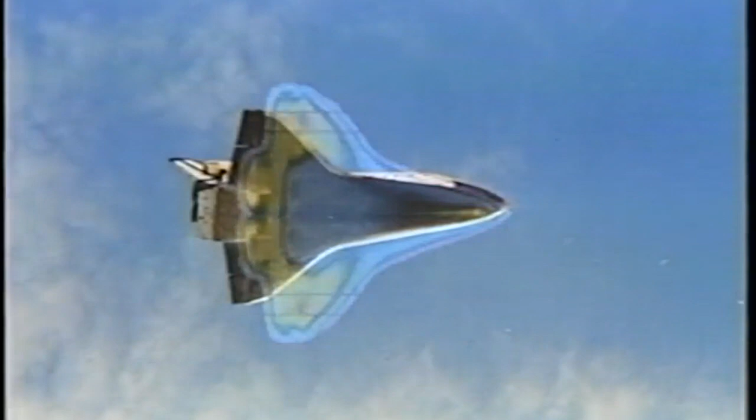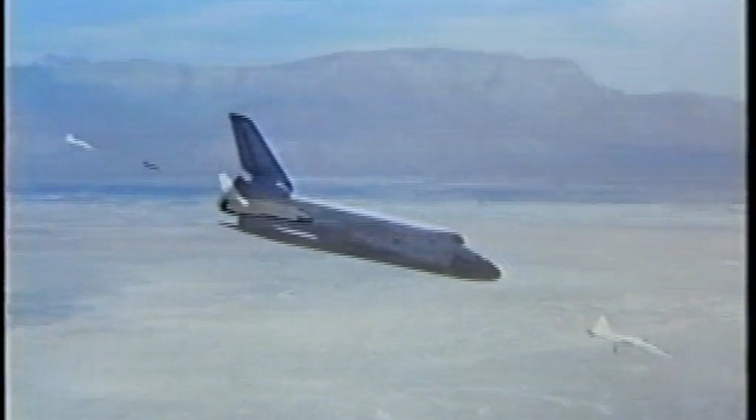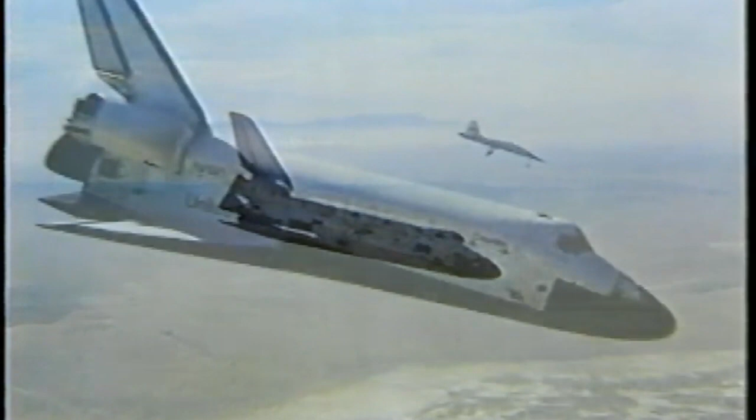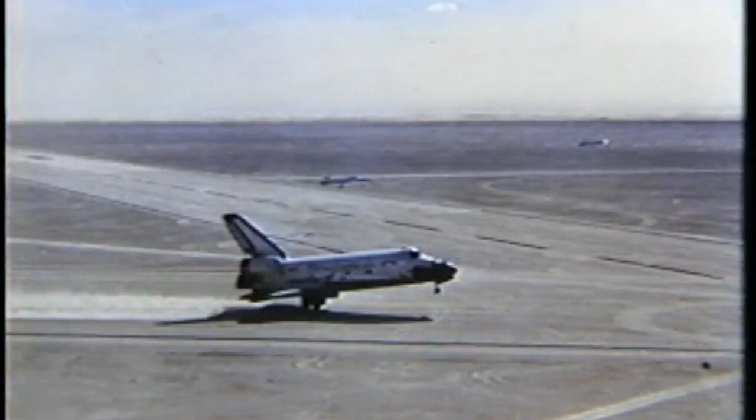A pilot's ultimate challenge. Landing a 100-ton shuttle following a week in space. 5, 4, 3, 2, 1, down. Landing on the numbers. Landing with no go-around. Beautiful, beautiful. Take it up to higher. Gonna dust it off first.

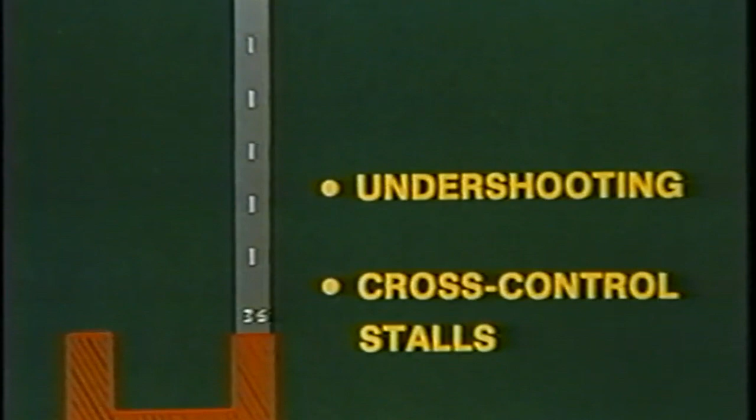In Part 1, we'll deal with undershooting and cross-control stalls, the kinds of accidents that can happen before you reach the runway. We'll also talk about hard landings, porpoising or pilot-induced oscillation, and loss of directional control, problems you encounter after reaching the runway. Part 2 explores problems stemming from improper braking, landing long, and poorly executed go-arounds. Part 3 addresses gear-up landings, landing gear emergencies, landings in inclement weather, landing at night, and human factors. We believe On Landings to be the most comprehensive educational safety program on this subject ever assembled.

Much of the material for this program came from actual case histories taken from the files of the National Transportation Safety Board and NASA's Aviation Safety Reporting System, files which were painstakingly merged into a comprehensive dissertation on landing phase accidents and how they can be avoided.

On Landings is not a substitute for basic pilot training. Although this program can be seen in one sitting, we strongly recommend that because of its length and the detailed and diverse nature of its contents, the 3 parts be viewed separately. And with that out of the way, let's roll up our sleeves and get started.

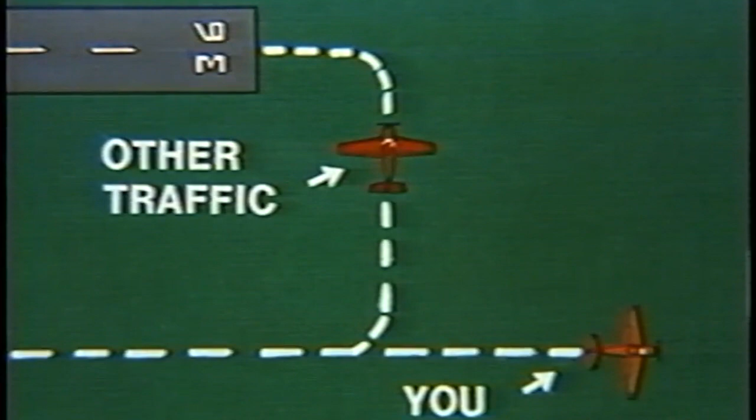Poor pattern or circuit technique is one of the frequent causes of undershooting, and a sure way to wind up in the boonies is not to pay attention to how far out you've flown on downwind. It also doesn't really matter much whether you got out there all by yourself or were forced there by other traffic. Either way, the fact remains that you're out there where statistics show you're at risk. Too wide a downwind leg can also contribute to undershooting. If you're on downwind and your passenger says, 'Hey, is that an airport over there?' maybe you're out too far.

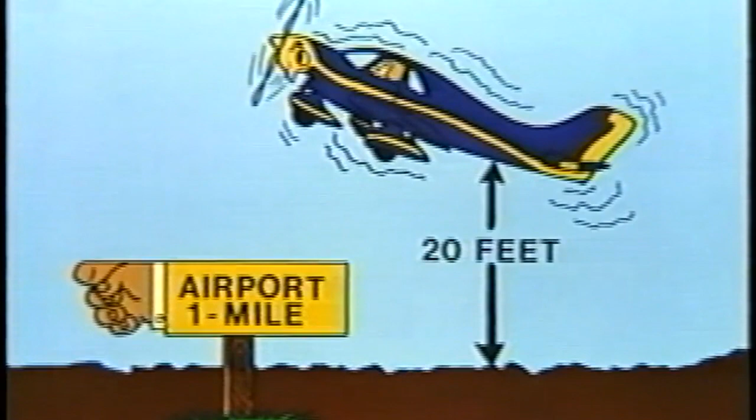Another contributing factor to the undershoot is not maintaining adequate power on final. Some pilots get a thing called runway fixation and unconsciously try to carry the airplane up to the landing spot by easing the nose up without adding power. This doesn't work very well. As a matter of fact, instructors standing by the runway watching their first solo students pull this stunt have been known to stand on their toes, shouting incantations in order to get the student and the airplane at least to the numbers, a process of dubious aerodynamic value, even though it does seem to help the instructors.

Another cause of undershooting is poor configuration management, which deals with the untimely application of flaps, gear, and so forth. For example, the pilot who decides to apply full flaps early in the approach without compensating with power might find himself running out of airspeed, altitude, and inspiration all at the same time. So you see, by not setting yourself up properly, you can set yourself up to undershoot the runway and ruin your whole day.

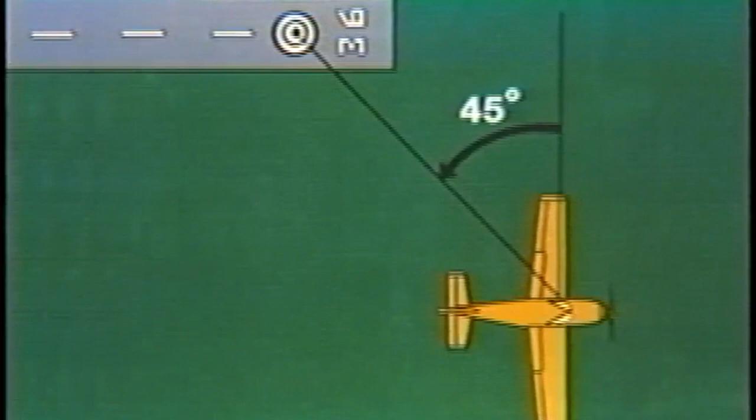Now that we've seen some of the don'ts, let's start talking about some of the do's. When traffic isn't a factor, a good rule of thumb is to turn base when the point of intended touchdown is 45 degrees behind the wing. This technique provides a consistent viewing perspective for every pattern. And remember to anticipate that 45-degree point, particularly when a significant tailwind exists.

At the airport where you're based, your normal tendency might be to use a crutch, such as a familiar ground reference, to turn from downwind to base. But don't forget, Farmer Brown's barn isn't going to be at an unfamiliar airport. So practice using the 45-degree technique. It's a good habit.

When you're in a pattern with other airplanes flying at comparable approach speeds, you can avoid flying an extended downwind by starting your turn to base just after the airplane you're following turns final and passes behind your wing. By the way, it's a good idea to have your landing lights on when you're in the pattern, particularly during times of reduced visibility.

Experienced pilots often use a series of imaginary windows on approach. These reference points in the sky are great aids in determining whether or not the approach is within the desired vertical and horizontal limits. The first window should be encountered immediately after turning final.

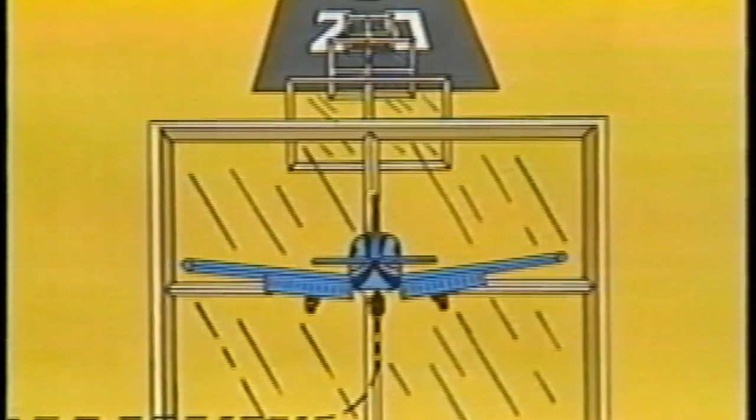If the approach is not within the limits of the window, the pilot can either correct the approach or execute a missed approach. The key to making that first window work for you is to roll wings level just before you fly through it. By the way, if there are obstacles between the windows and the runway, we think it's a swell idea to either raise the window or move it.

The last and most important window is the one at the threshold. You should be at the required airspeed and height to begin your flare when passing through this one. If you've timed everything out just right, you should be able to roll wings level on final right on the extended runway center line and fly through the windows to the runway.

Flying through the windows is an excellent aid to flying a stabilized approach, which is our next topic of discussion. But before we get into talking about flying a stabilized approach, it's important that we talk for a minute about flying the right airspeeds.

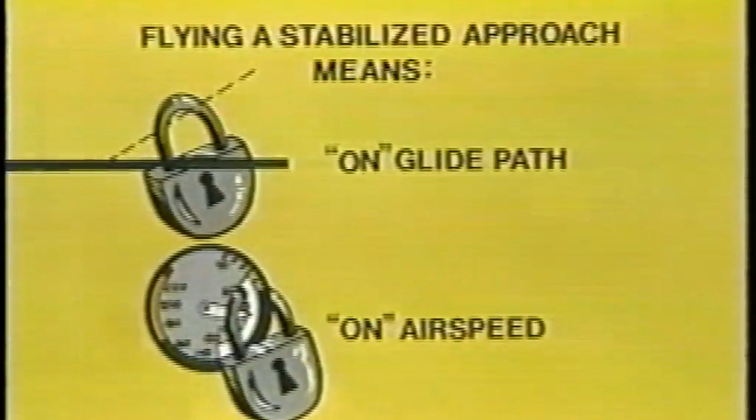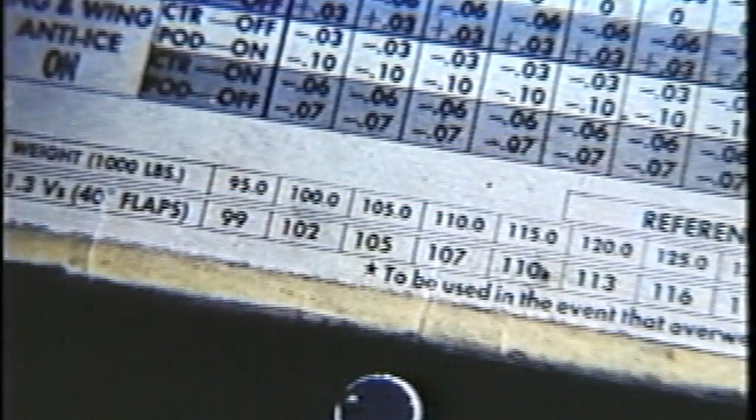Pilots of large aircraft always determine what their approach speeds will be for downwind, base, final, and short final before initiating their approach. To find them, all they have to do is calculate the aircraft's landing weight, then look in their charts for the appropriate reference airspeed. That's the airspeed known as VREF.

VREF is a keystone, or basic building block, for every approach. VREF is a value which is usually different on every approach, but it's always derived from the airplane's stall speed at its estimated landing weight.

To VREF, the pilot adds the additional airspeed required to maintain an adequate safety margin while banking and maneuvering in the pattern, as well as additional airspeed to compensate for wind gusts, turbulence, and wind shear.

Approach segment airspeeds, which are based on VREF, are vital tools in making sure that the airplane doesn't just have an extra margin above the stall speed for maneuvering and turbulence, but has the right extra margin. Professional pilots don't want any more speed than they need, and they certainly don't want to have any less.

In comparison with large transport category aircraft, smaller aircraft don't usually come equipped with VREF tables, or for that matter, with tables that give recommended approach segment airspeeds at different landing weights. But such tables can be developed, and we urge you to prepare and use your own. We have provided a sample table in the handout that accompanies this program.

Before you begin to fill it out, though, we want you to be sure to hear what we have to say about VS0 in Part 2. Incidentally, since most pilots refer to VS0 as VSO, we'll do the same.

Here are some rules of thumb for determining approach segment airspeeds. When you're on downwind, we recommend that you fly at an airspeed that is no higher than the top of the flap operating range and, in no case, lower than 1.4 VSO.

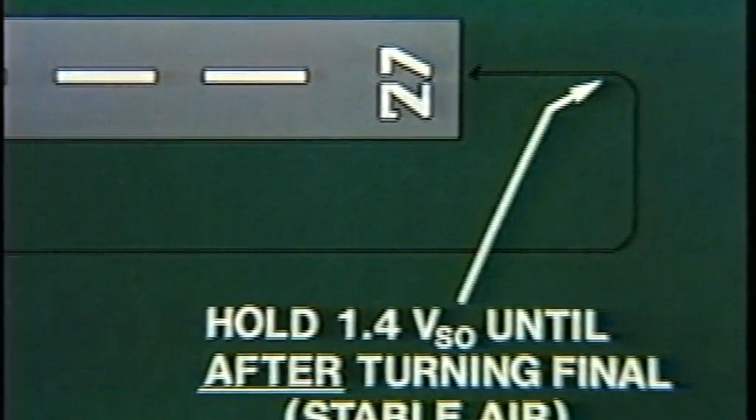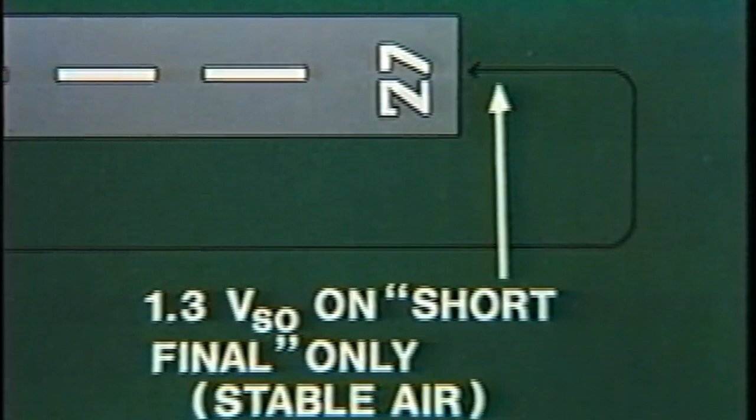Continue to maintain no less than 1.4 VSO until after you've turned on base, and hold 1.4 VSO until after you've turned final. Then let your airspeed decay to 1.3 VSO as you near the runway. That's what we call short final, but make sure that all your maneuvering is behind you first.

Of course, if you're encountering any turbulence, wind gusts, or wind shear, you should compensate for them with additional airspeed on each segment of the approach. We'll discuss the effects of turbulence and wind gusts in greater detail a little later on. Right now, however, let's talk ourselves through a stabilized VFR approach.

First, of course, you make a normal entry to the traffic pattern or circuit. Then extend your gear on downwind, that is, if it's not already bolted in place, like it is on a Stearman. And when you're abeam your point of intended landing, reduce your power to the predetermined value that works best for your airplane.

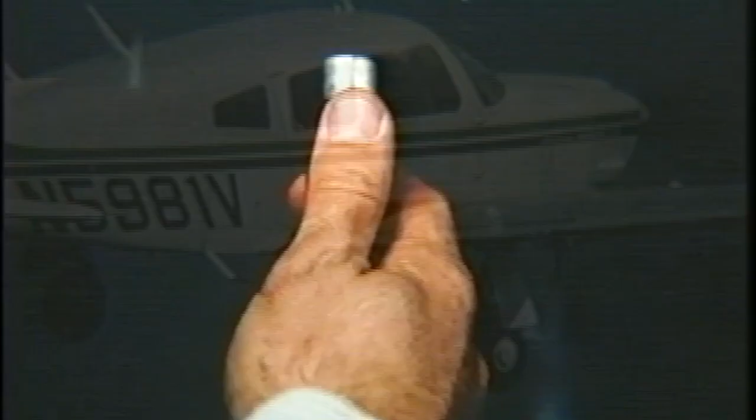And while holding your altitude with pitch, slow yourself down in preparation for turning base. Then set partial flaps, if you haven't already done so, and if you've reduced your power properly, you can now trim the aircraft and set up your descent.

Begin your turn to base at the 45-degree point, traffic permitting, remembering to keep your angle of bank to 30 degrees or less on this turn, and 30 degrees or less when you turn from base to final. Also, keep the ground track as rectangular as possible.

Should you need to increase your rate of descent, you can do so by further extending flaps to increase drag. If you do, remember that you've just modified your approach configuration and that you may have to add more power to stay on glide path at your targeted airspeed.

Now, a fundamental key to flying a stabilized approach is understanding the importance of the interrelationship between pitch and power. At any targeted airspeed, in any configuration, applying more power will make the glide path shallower, and reducing power will make it steeper. The fact is that pitch and power are so interrelated that changes in one must be compensated for by adjustments in the other.

So after a glide path has been selected, the means of staying on it and maintaining your targeted airspeed can only be achieved by adjusting pitch and power together to compensate for variables such as wind and drag.

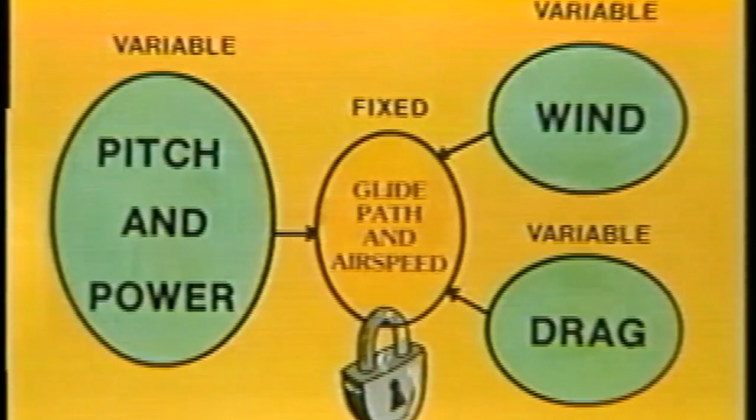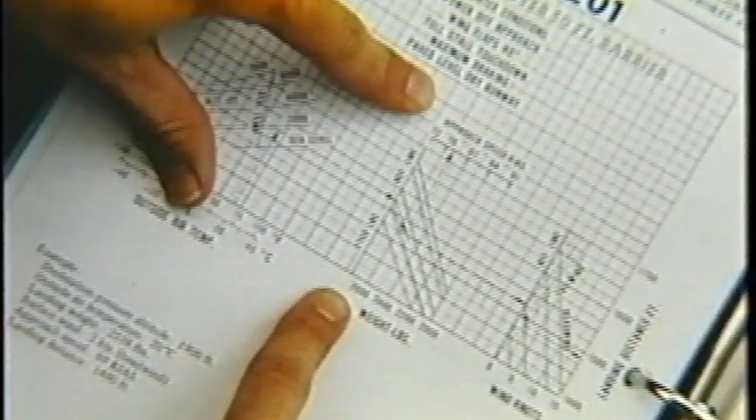Experienced pilots know the power settings and airspeeds for different landing weights, drag configurations, and principal rates of descent. If they don't know these numbers, they'll have them written down for easy reference, or know where to look them up, and can quickly select the normal power setting for each segment of the approach for a no-wind condition.

Then, when flying the actual approach, they only need to make minor pitch and power adjustments to maintain the selected glide path and airspeed. And with experience in type, the use of power becomes automatic.

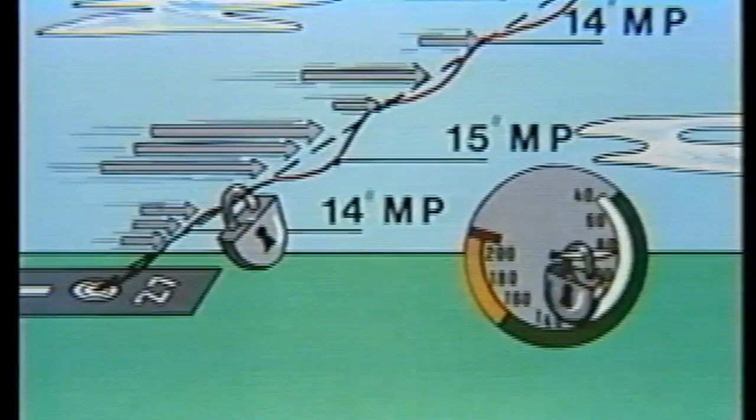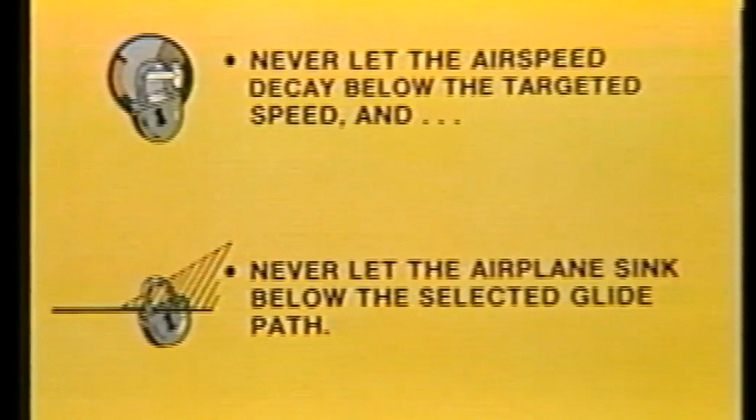The important point to remember is to never let your airspeed decay below the targeted speed for each segment of the approach, and never let the airplane sink below the selected glide path. If you do get too low, add power. But never allow yourself to get behind the power curve.

Oh yes, I'd also like to remind you that full flaps should be used on all normal landings. Remembering, however, that once flaps have been extended, they should not be retracted. Which is why it's a good policy not to go to full flaps until your landing is assured.

Now let's talk about flying a stabilized IFR approach. You'll find that the same basic concepts and techniques we've been talking about apply.

As you approach the airport, the first thing you want to do is transition the airplane to an approach configuration. That is, you want to slow the airplane to a lower airspeed and retrim it while maintaining the assigned altitude and heading. To do this, first slow down to your initial approach airspeed well before you intercept your descent glide slope, unless ATC requests otherwise.

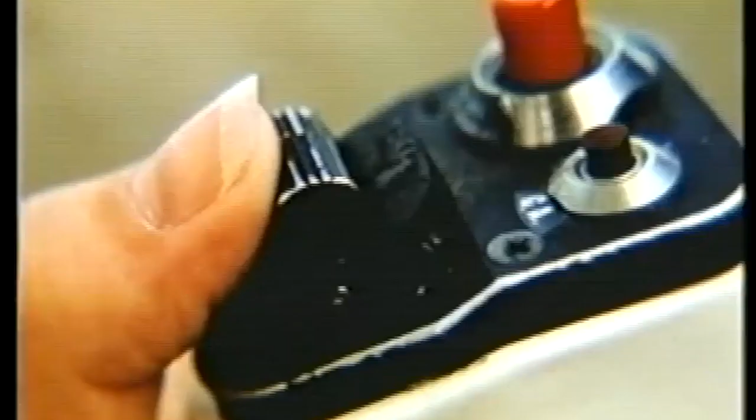Some pilots extend their landing gear to help them slow down, then add flaps after the airspeed has dropped into the flap operating range, remembering to retrim as necessary.

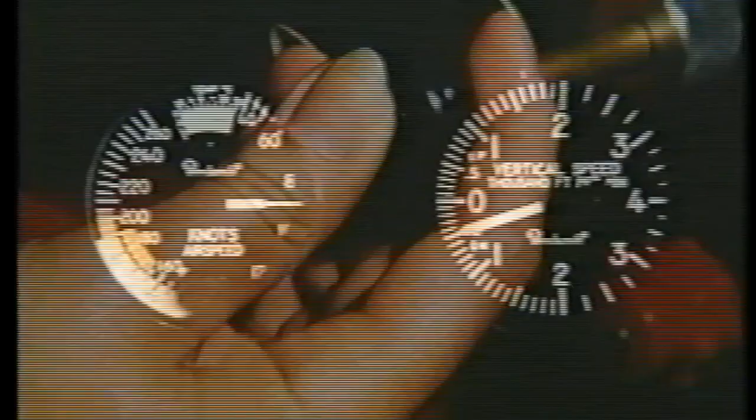Now, when you intercept the glide slope or reach the final approach fix, put your gear down if it's not already down. An additional power adjustment may be necessary at this point. You should now be able to hold the selected airspeed and set up a stabilized rate of descent with few, if any, additional changes in power.

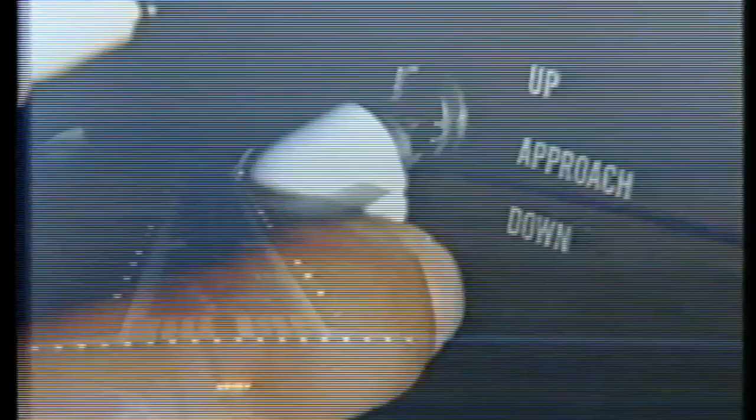For most light airplanes, when the runway's in sight and the landing's assured, extend full flaps, but make sure you're on top of the airplane, because if you add flaps too rapidly and don't properly compensate with pitch and trim, you could balloon right back into the clouds. But a properly executed, stabilized approach will set you up for a good landing.

You might be interested to know that accidents involving undershooting the runway are usually much more serious than overshooting or landing long. If you've never stopped to think about it, it's because impact velocity, momentum, and kinetic energy are all much greater in an undershoot than when you roll off the end of the runway in an overshoot.

So, if you ever have any doubt about making the runway, either carry or add enough power to assure yourself a safe landing. And as always, on any approach, be absolutely sure that power will be available when you need it. Don't forget any critical engine-related item.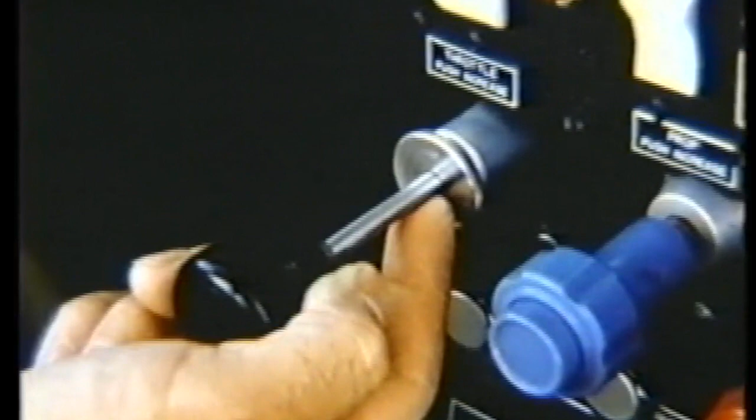Use your checklist. If you think this sounds trite or basic, it's forgetting the basics that can kill. A significant number of all landing phase accidents are caused by loss of power, and they're usually related to some basic step the pilot simply forgot to do, like not adjusting the mixture for density altitude, selecting the wrong fuel tank, or not using carb heat.

And let me re-emphasize this point one more time. Whether you're VFR or IFR, never descend below your approach path or allow yourself to get under the targeted airspeed. If you do, adjust power and pitch immediately, and anticipate the need, okay?

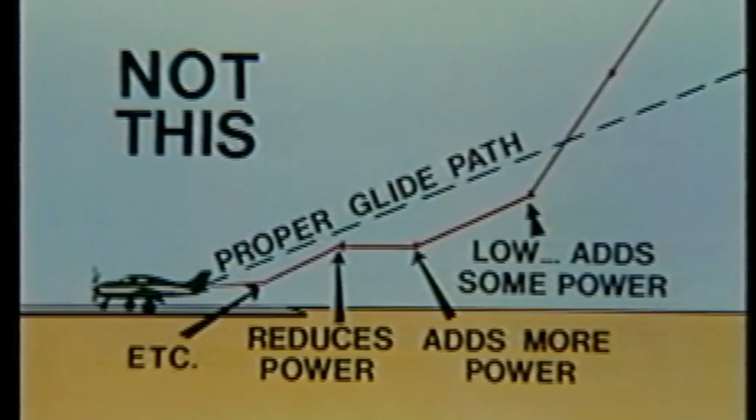I mean, look at this. See what's wrong here? Now look at this. Well, at least it's better.

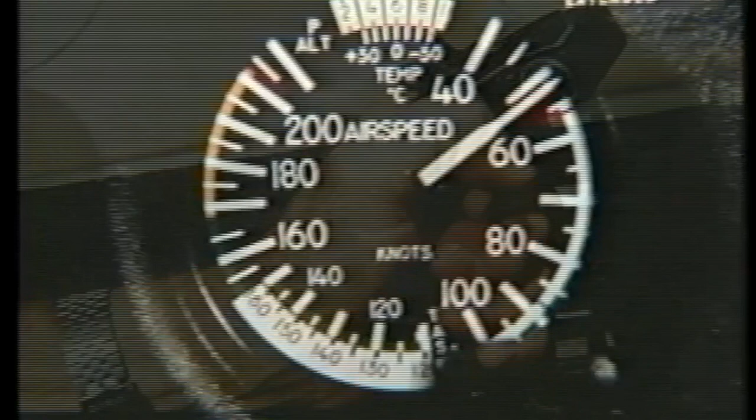And finally, in most undershoot accidents, the pilot is unconsciously trying to hold altitude or make the runway through the use of elevator alone. Please don't do this. You see, if you keep coming back on that elevator without adding power, you could bleed off so much airspeed that you'll get behind the power curve and mush or stall into the ground.

A perfect way to sucker yourself into the ground is to shoot a long, low approach, especially in unstable air when there's a high-density altitude, because you can wind up behind the power curve even though the throttle's wide open and you're generating all the power the engine can muster. If you find yourself in a situation like that, the only thing you can do is lower the nose and regain airspeed, if you've got the altitude to do it.

We simply cannot overemphasize the importance of using the proper combination of pitch and power throughout the landing approach.

Now, let's take a look at some of the key points so far. Know and use the appropriate approach speeds. Never get below your targeted speed. Fly the proper glide path. Add power anytime you even think you're too low or slow. And remember that pitch and power are interrelated.

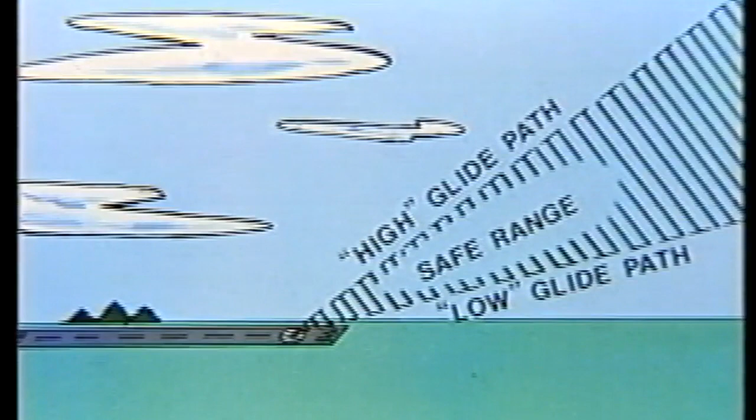Once you've selected your aim point, you must also select the right glide path. If you're not using a system such as VASI or ILS, glide path selection becomes a personal decision. Select the glide path that works best for you, but make sure that the glide path you choose allows for clearance of all obstacles and for a safe rate of descent.

Looks okay. Are you sure?

Here is a pilot's eye view of a well-selected glide path. This one, on the other hand, is too high. And this one is too low. And this one is definitely too low.

A visual approach slope indicator, or VASI, is often a good aid in helping you establish the proper glide path. Here is an example of a standard VASI system. A word of advice, though: all VASIs will keep you clear of obstacles, but glide angles may vary from VASI to VASI. Some complex standard VASI systems also provide multiple glide angles to assist everything up to and including jumbo jets.

On the other hand, many small airports in the U.S. have various kinds of non-standard VASI systems. One popular low-cost system consists of 3 panels, sometimes built of plywood and occasionally built of plastic. Some non-standard VASIs are painted black. Some are painted white. Some are also painted black and white. Some others are painted fluorescent orange. And some are not painted at all.

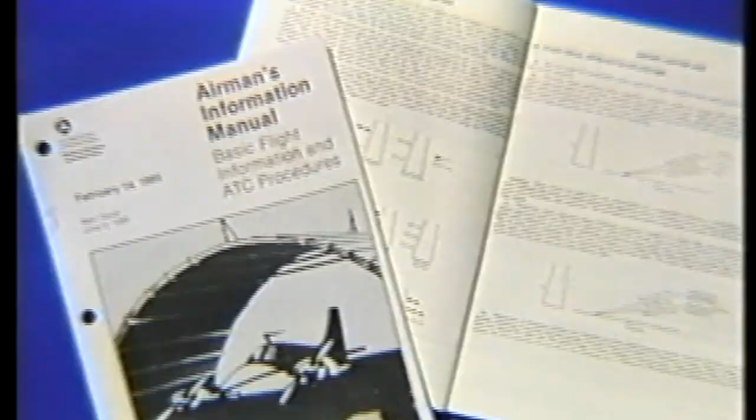In the States, the Airman's Information Manual provides a detailed description of how standard as well as non-standard VASIs work, while the Airport Facility Directory, or AFD, provides VASI glide angle information for standard VASIs only, on a runway-by-runway basis. In Canada, the comparable reference publications are the AIP Canada, also known as the Aeronautical Information Publication Canada, and the Canada Flight Supplement.

There is another way to establish your glide path, of course, and that's to fly the glide slope portion of the ILS or MLS if either is available. Regardless of how you fly your aim point, though, have a plan. Don't just wing it. Statistics show that it's in winging it that pilots get into real trouble. So be careful.

Now, so far we've talked about undershooting problems generated by the pilot. Problems such as not flying a good pattern, poor power and pitch management, and so forth. Now let's talk about undershooting caused by wind and turbulence.

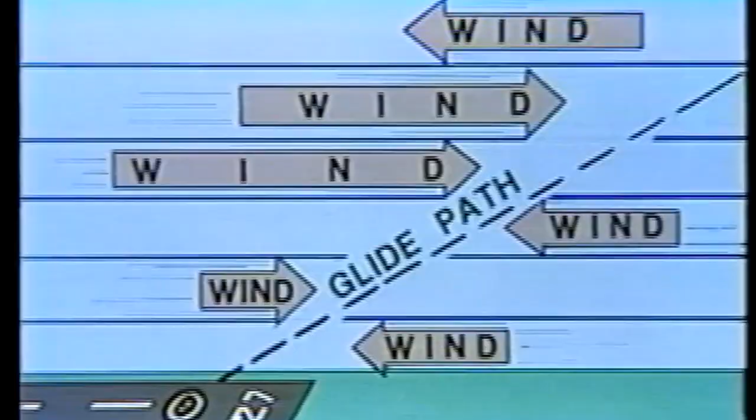On final approach, your glide path can be affected by wind, wind shear, microbursts, and other atmospheric turbulence, as well as by wake turbulence. Wind shear is a sudden drastic shift in wind speed and/or direction in a vertical or horizontal plane. This may occur at any altitude. It is a serious factor for large aircraft operations, but can be a hazard for small aircraft as well.

Microbursts, on the other hand, are sharp, very strong downdrafts associated with thunderstorms. They can be impossible to outmaneuver, and since they are completely invisible, are a very good reason to stay clear of any airport that has a thunderstorm in progress.

Another good reason to steer clear of airports in the vicinity of thunderstorms is because of the increased risk of radical shifts in wind direction and speed. A headwind on final may suddenly turn into a tailwind and cause a sudden high rate of descent.

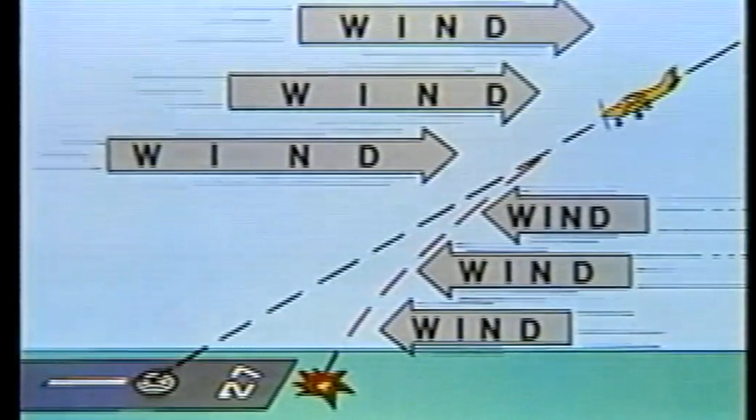Don't forget, however, that turbulence can be generated by other things as well, such as strong air currents spilling across nearby mountains, winds gusting over wooded areas that parallel runways, and turbulence generated by wind blowing past hangars and other structures. So always expect the unexpected, and when you encounter it, especially on short final, be ready to add power and go around.

A good rule to live by: the sooner you add power, the less likely you'll be to wind up between a rock and a hard place.

Remember, it's considered a below-average landing if you have to taxi the last 100 yards or more to the runway.

Finally, whenever you operate in the vicinity of an airport served by large aircraft, be alert for wake turbulence. If you do operate in or out of a large airport, study the wake turbulence avoidance procedures from time to time. They're published in the Airman's Information Manual, the AIP Canada, and other publications.

That just about does it for undershooting the runway. As we mentioned at the beginning of this part, stalls are another frequent cause of landing phase accidents, and the deadliest of all of these is the cross-control stall.

A cross-control stall is usually set up on base, and the potential for it becomes greater in the presence of a tailwind, which results in a higher ground speed on base, and thus less time to properly set up your turn to final.

Now, add to your tailwind a little something that diverts your attention, such as conflicting traffic, and the fact that your passenger is a little old lady who can't handle steep turns, and the scenario is complete.

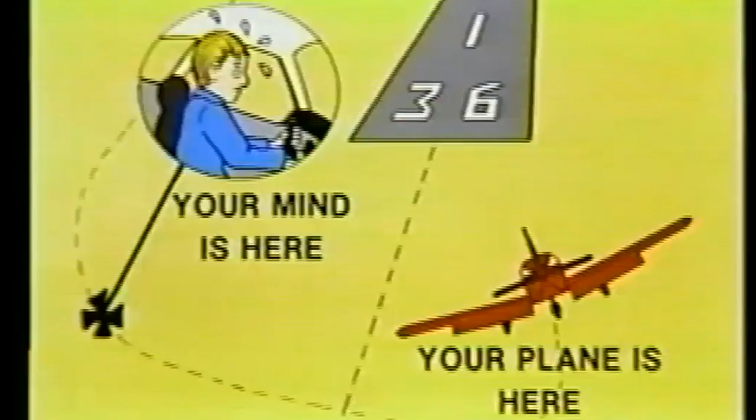Between the tailwind and the traffic, it's very easy to get behind your airplane and overshoot your turn to final. You don't want to make a steep turn because of your passenger. But you also want to avoid the embarrassment of overshooting your turn to final, so now you've got to do something radical.

Why would you be embarrassed? Well, when you took off, every pilot you knew was milling around the airport just looking for something to talk about. And you know for a fact that they're all down there right now watching your every move. So you know you've got to be real cool.

As you realize that your airplane has flown past the extended runway center line, 3 choices come to your mind. Choice number 1, you can go around and try again.

But if you take it around, you just know that all those macho pilots down there are never going to let you forget it. You just know it, don't you?

Choice number 2, you can steepen the bank. A lot. Sort of like fighter pilots do in the movies, and roll out right on the center line. That's what the peanut gallery would like to see you do.

But that would make your passenger tense up. Besides, you know that your stall speed will increase significantly with your angle of bank.

You've known about the stall speed curve since you started flying, and you know that below 30 degrees of bank, you have a good safety margin. But above that, the stall speed multiplier increases a lot.

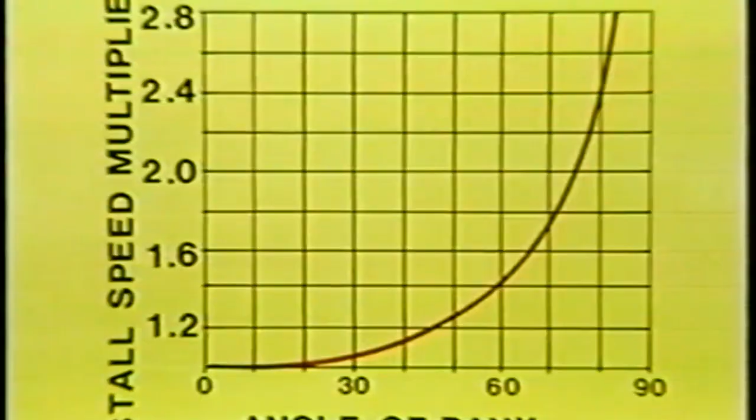You also know that you don't have the airspeed to make that steep turn right now, because in this example, your airplane has a wings level stall speed of 51 knots, and you've already slowed to the final approach speed of 66 knots. But in a 60-degree turn, you'll stall at 72 knots. And 72 knots is 6 knots faster than you're going right now.

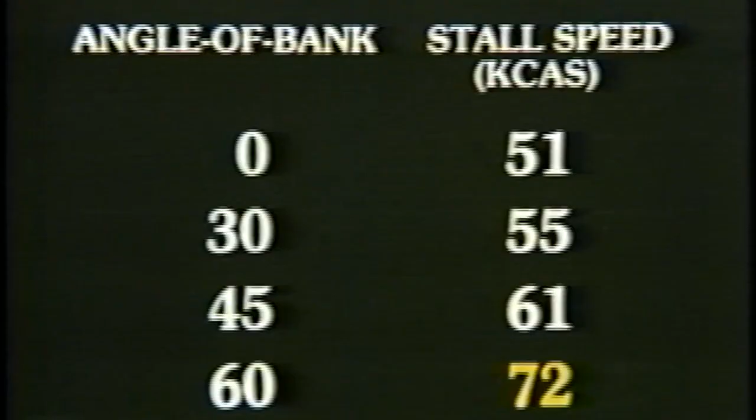So, forget number 2. Now, the only other choice you can think of is choice number 3, and that is to increase the rate of turn but keep the bank angle shallow by using inside rudder, in this instance, left rudder and opposite aileron.

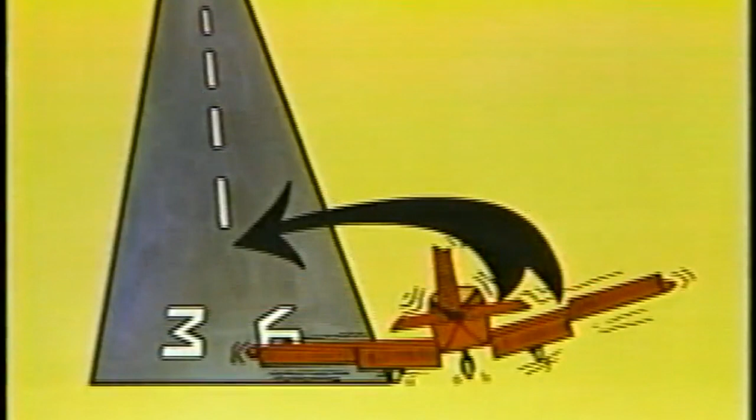This results in a skidding turn with inside rudder and enough opposite aileron to let you keep the bank angle nice and shallow. Of course, you'll need more up elevator now because the combination of inside rudder and the drag of that down aileron makes the nose tend to drop.

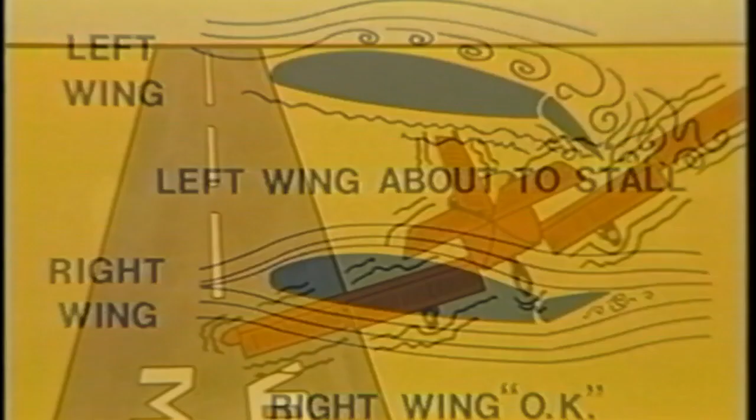But as you add more up elevator, you're slowing the airplane and you're approaching a cross-control stall. That left wing, the one with the aileron down, is about to reach its critical angle of attack. And when it does, it'll stall and snap roll you sharply to the left.

And there you'll be in the middle of an air show, literally shooting your final approach. As a matter of fact, it's a good thing that little voice told you to go around, because with an approach like this, no one, not the pilots watching you from the ground, not even your passenger, would ever speak to you again.

You know what? All of a sudden, choice number 1, going around, didn't look so bad after all, did it? You see, you've already made 2 mistakes.

Overshooting your turn from base to final was the first one, but not flying the appropriate airspeed for your base leg was your second mistake. You had slowed your airplane down too soon. You were already at 1.3 VSO, which is the short final approach speed, and you were still on base.

I think by now you're beginning to realize that safe landings begin with pre-planning and must be executed with precision. So now that I have your attention, let me give you some pointers.

Complete as much of your before landing checklist as you can before entering the pattern. It will help you avoid a work overload situation and let you be more responsive to changing conditions.

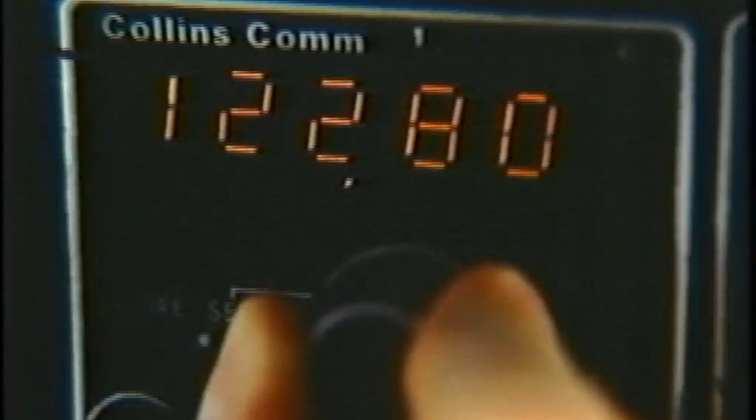Look outside the cockpit. Look around. Check those classic wind indicators: flags, ponds, smoke, and so forth. Listen to your radio. If there's a Unicom in operation or a nearby ATIS, get wind speed and direction.

And when there's a direct crosswind and you have the option, set up your pattern so that you'll have a headwind on base rather than a tailwind.

Remember these key points. Airspeed control is vital. Never get below your selected approach speeds. Watch your angle of bank and keep your turns coordinated.

You know, old pilots don't always agree on everything, but one thing they'll all tell you is that a bad approach is a setup for a bad landing. So if things don't look right or don't even feel right, take it around and try again. We'll have more on go-arounds in Part 2.

Now we're going to look at three types of landing accidents: the hard landing, the bounced landing, also known as pilot-induced oscillation, and loss of directional control on rollout. These accidents are usually not the killer-type accidents like the cross-control stall and the undershoot, but can still result in substantial aircraft damage, many injuries, and a whole lot of pilot embarrassment.

Let's begin by talking about hard landings. Did you know that drop-in type accidents, or hard landings, cause a great deal of monetary damage to airplanes every year? Hard landings take their toll in deaths and injuries too. These accidents result from several causes.

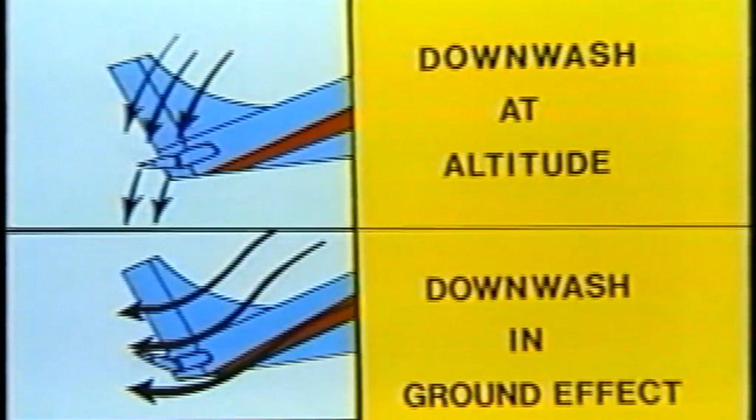What happens is that, in ground effect, the elevator or stabilator is less effective than it is at altitude. And since most airplanes are also more stable longitudinally in ground effect, the nose feels heavier and requires more effort to hold off during flare. When no trim is used, the nose feels so heavy that you want to relax back pressure as soon as the airplane lands. And when you do, you're right back up in the air. Again, and again, and again.

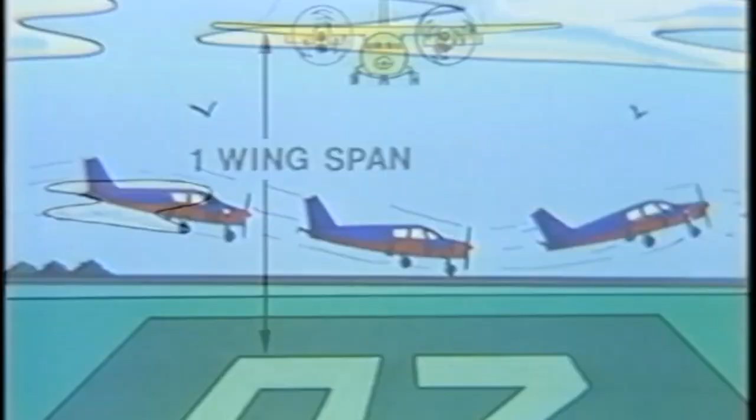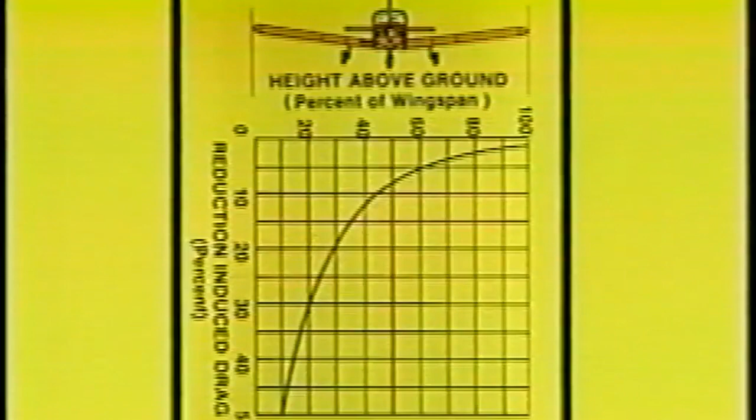By the way, ground effect, which is really a reduction in induced drag, is a factor from the surface to a height above the ground that's the equivalent of about one wingspan, which is 40 feet for most light aircraft. And it doesn't matter much whether you're a transport or a four-seater. P.S. Don't try to figure this out now, but this nifty chart is in your handout and can tell you more than you ever wanted to know about ground effect, which, as we mentioned earlier, is really a reduction in induced drag.

Okay, let's move on. We've all been taught to maintain the proper pitch attitude during flare, haven't we? But unfortunately, many of us never got the chance to understand what it really meant. So, what is a proper pitch attitude anyway? Well, for tricycle gear aircraft, both large and small, it's the landing attitude that lets you keep the nose gear off the ground until after the mains have touched down.

For a light single, this is what it looks like from the cockpit.

This is the view from a light twin, and from a biz jet. Do you see any difference? Although we couldn't afford the cockpit view from the Concorde, the fact is you'll need to develop a feeling for your specific aircraft. The best way to do this is to stay proficient. You need to know what it feels like for different weight and CG combinations, and what it looks like, both the view and the sensation. They're important feelings that simply cannot be quantified.

Bouncing or porpoising can also be caused by improper airspeed control, beginning with an approach that is usually too fast. As a result, the airplane floats down the runway until the pilot consciously or unconsciously tries to force it on, a phony grease job, even though it's still at flying speed. What can happen is that a gust of wind, a bump in the runway, or a slight jerk on the wheel or stick will put it right back up in the air again. If this happens, re-land the plane, making sure the nose is in the proper pitch attitude when it touches back down.

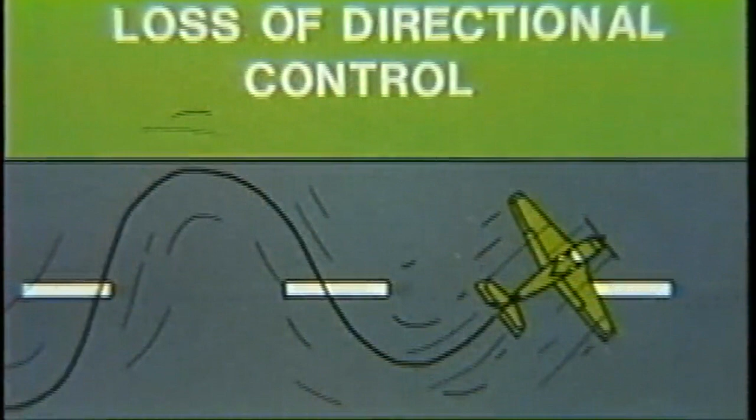Let's move on. The next subject is loss of directional control, something else that tricycle-geared airplanes were supposed to do for us. Engineers thought that tricycle gear would eliminate directional control problems and ground looping.

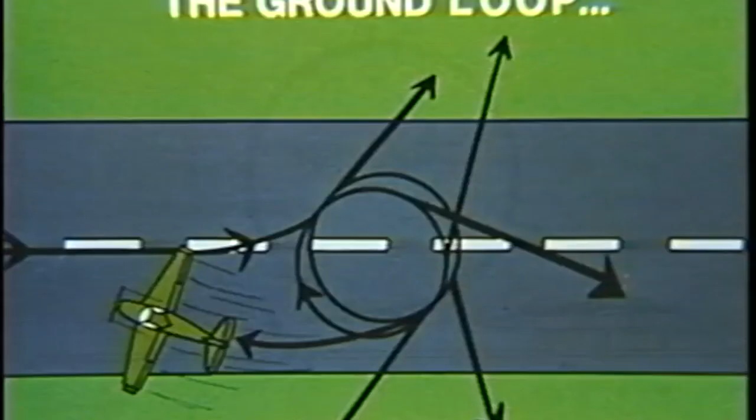By the way, when we talk of ground looping, this is not what we mean. For those who aren't familiar with the ground loop, it's actually the term used to describe an uncontrolled turn, or series of turns, by an airplane while in motion on the ground. And ground looping can be very violent.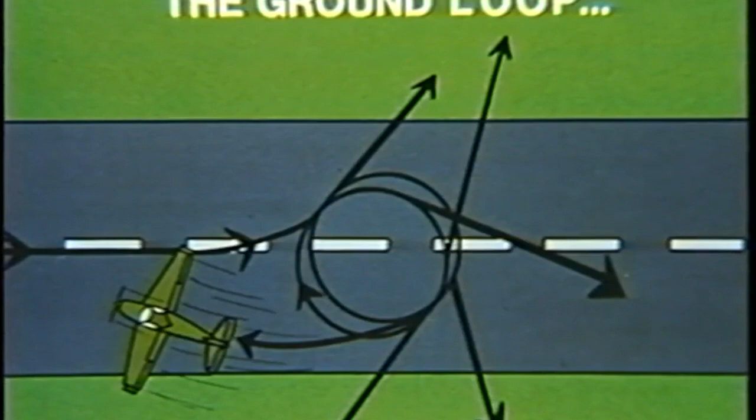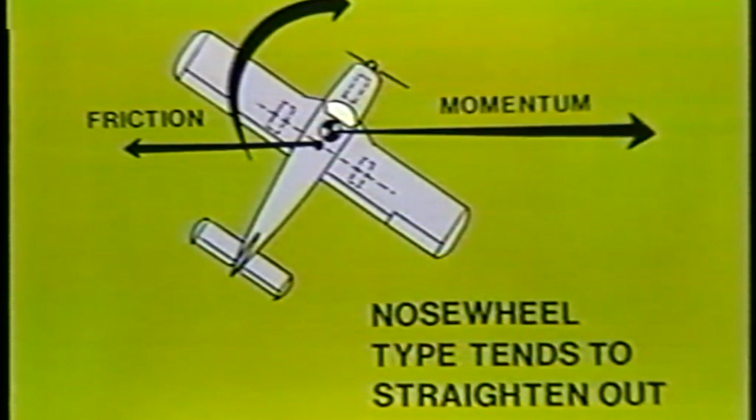Engineers reasoned that with the advent of tricycle-geared aircraft, with the center of gravity ahead of the main wheels, the airplane would tend to straighten itself out, and ground looping would become a thing of the past. But surprise! Once again, the aeronautical wizards underestimated the ingenuity of the average pilot, who ably thwarts the laws of physics without even thinking about them.

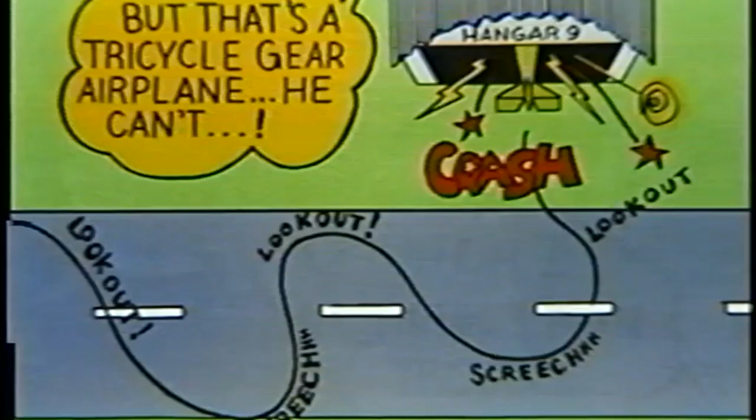In an effort to keep you from falling into this ingenious category, let's look at some of the usual pitfalls and see how they can be avoided. The key to maintaining good directional control is to recognize and correct problems early. Stop that turn before it starts.

Don't wait. One way to avoid loss of directional control is by understanding how the flight controls, elevator, ailerons, and rudder, really work. When landing an airplane with tricycle gear, keep the wheel or stick well back during the rollout to desensitize the nose wheel. Or, if you're flying a tail dragger, to put more weight on the tail wheel.

Forward pressure, or insufficient back pressure, causes wheel barrowing, which puts more weight on the nose wheel. A heavy nose wheel makes the airplane become extra sensitive to rudder pedal movement, which can be aggravated in a crosswind when your inclination is to plant all three wheels firmly on the runway as soon as possible. Landing this way only invites loss of directional control.

On the other hand, if you relax back pressure, the use of a little more rudder than usual to correct a slight swerve could result in an overcorrection, and your airplane might suddenly dart across the runway, towards the runway lights, in a direction never intended and never imagined.

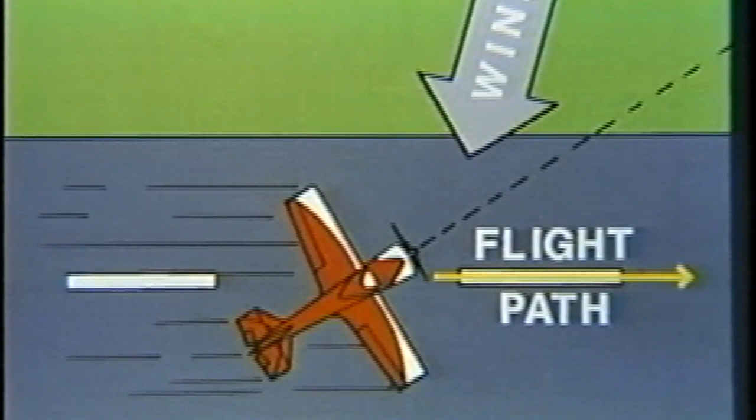Because if you touch down like this, or this, you'll probably lose directional control, and could wind up back in the hangar a lot sooner than you thought. Side loads imposed on the landing gear don't do much for the airplane's resale value either.

4-1 Echo, wind check please. Wind 270 at 13, gusting 20. It's a good habit to double-check the winds on final.

The pilot in command here knows that he must lower his left wing with left aileron and counter with right rudder to maintain the proper ground track at the moment of touchdown. A good pilot also keeps the capabilities of his aircraft in mind and avoids crosswinds which are greater than the demonstrated crosswind component.

During the flight planning phase, he checks forecast winds at his destination and updates himself en route. If on arrival he discovers that the crosswind exceeds either the airplane's demonstrated capabilities or his own proficiency, he opts for the runway most aligned with the wind, or flies to another airport where such a runway exists. In some cases, the best decision might be to just stay on the ground until the winds die down.

By the way, one of the most embarrassing kinds of directional control accidents occurs when the pilot tries to clear the runway by turning onto a taxiway before he's slowed down enough. Sometimes he's simply locked in to following that yellow line and forgets that he may be taxiing along at something very close to flying speed.

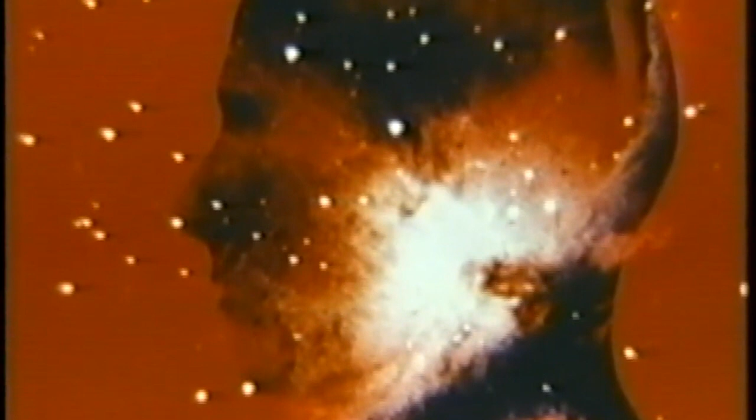Additionally, inexperience, lack of recent proficiency, and especially lack of recent proficiency in a stressful situation can all result in the pilot getting behind his aircraft, or even freezing up at the controls.

Remember the instruction on the mayonnaise jar: keep cool, but do not freeze.

Freezing or inadvertently panicking at the controls can also result in a pilot reverting to years of driving habits and trying to drive the airplane down the runway, even though deep in his heart, he knows that trying to drive an airplane with the control wheel has no effect.

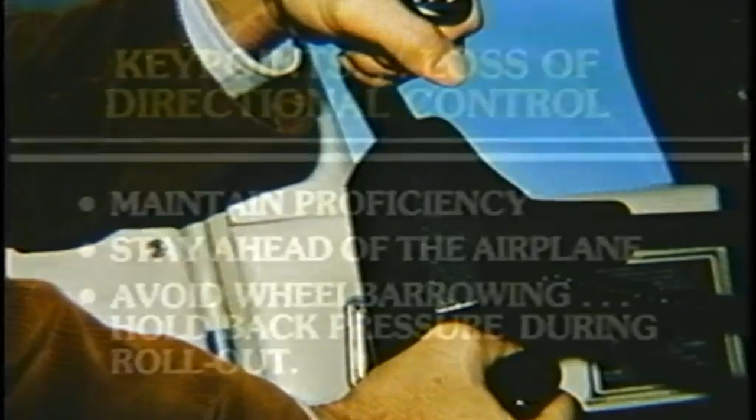In summary, directional control accidents can be greatly reduced if, as pilots, we follow these simple rules. Maintain proficiency. Stay ahead of the airplane. Avoid wheelbarrowing by holding back pressure on the controls during rollout. Keep your flight path and longitudinal axis parallel to the runway centerline.

Double-check your wind conditions on short final. Stay within the demonstrated crosswind capabilities, both yours and the airplane's. Slow the airplane down before taxiing clear. Keep your thoughts on the tasks at hand.